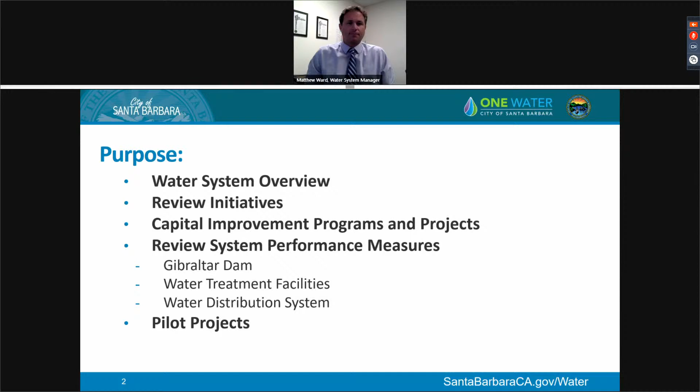Thank you. This is our water system overview, and I know the water commissioners are familiar with this. It's always impressive to see how we are able to supply water to our region. One of the fun facts I always share with others is how Gibraltar water is conveyed to Lauro Reservoir, which is our forebasin for the Cater Water Treatment Plant, and then distributed throughout the city, all by gravity. So that's always a fun fact to share.

Gibraltar recently celebrated its 100th year birthday, and many of our components in our distribution system, mainly our water mains, are also at that centennial mark as well. Next slide.

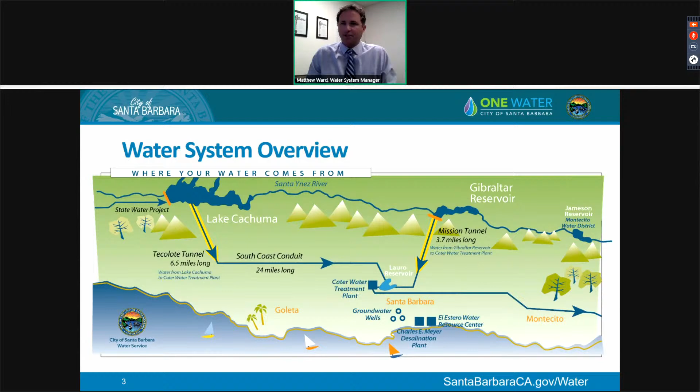And of course, you are familiar with Mr. Haggmark and myself as the water system manager. I would also like to introduce Theresa Lancy, who was recently appointed to the water distribution superintendent position. She oversees over 40 staff with the support of her 3 supervisors, who include Robbie Days, who oversees our pipelines, Roger Arroyo, who oversees our pump stations and reservoirs, and Maggie Heinrich, who is our acting water distribution supervisor, overseeing our metering, admin, and planning efforts.

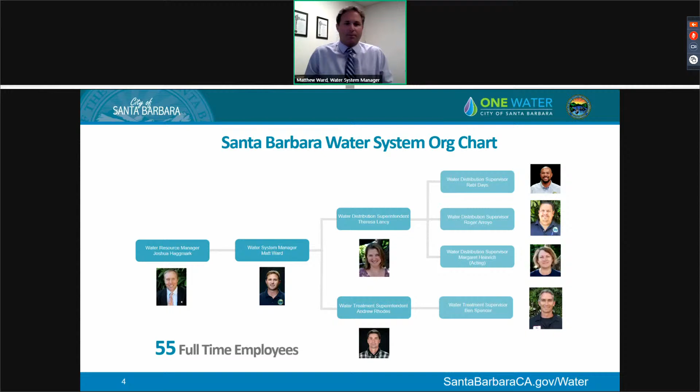Next, I want to introduce Andrew Rhodes, our water treatment superintendent. He oversees our Cater water treatment plant as well as the Ortega groundwater treatment plant, and has been instrumental in helping us manage our desal contract and understand the treatment components. He has supported and overseen over 15 employees for our treatment facilities, and Ben Spencer, the water treatment supervisor, assists him. Altogether we have 55 full-time employees and about another dozen hourly employees who make sure the water system is operated. It's quite an effort to get water all the way from our surface supplies to downtown.

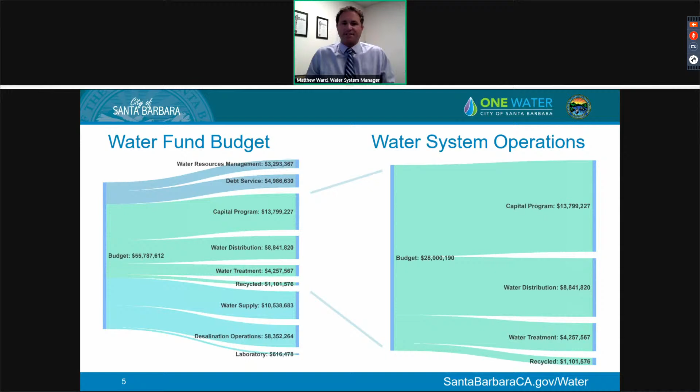On the left you see the water fund budget is over $55 million. The water system operations and capital component of that is over half, so $28 million in total. The main components are our capital program, almost 14 million; our water distribution program, nearly 9 million; our water treatment program, just above 4 million; and our recycled water program, about $1 million annually.

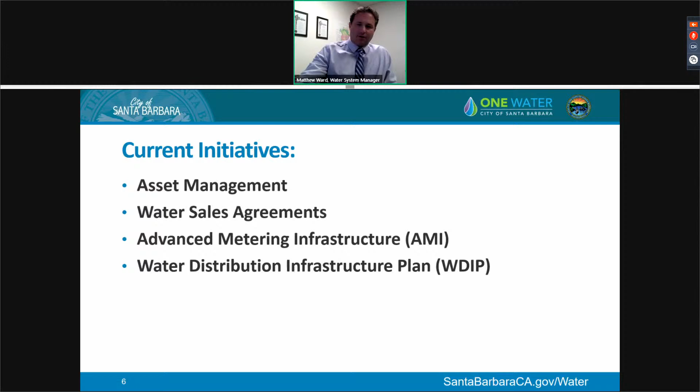I want to go over the current initiatives that I mentioned earlier. That includes our asset management, water sales agreements or regional partnerships, our advanced metering infrastructure work, and also results from the water distribution infrastructure plan, which you also have a copy of. I do want to mention that the copy you have is not final, it's actually in draft form, so wanted to make that clear.

So our asset management update. The water system has tens of thousands of assets or components. We're working to track those using electronic inventorying by location, and also maintenance management software to track conditions, cost for budget purposes, and projecting useful life. As far as asset management goes, it really takes about a decade of effort to get a fully developed program, so we're fairly new to the maintenance management software component.

Water distribution began working using Cartegraph as a database. It's actually used citywide, which is important, but also adds complexity because it involves other users such as transportation and streets. We've been working collectively to figure out how we can track all of our assets collectively, especially in areas of overlap, for example between streets and water, and I'll talk more about that later in how we're coordinating.

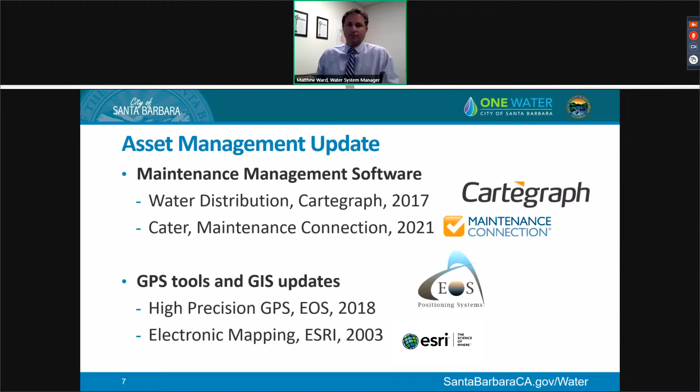We're also going to have to figure out the impacts to our organization with this new information that we're going to be gathering. So we'll be coming back to you for feedback and also to share what we believe it'll take in order to make sure that we're able to maximize the use of AMI data for our customers and also for our operations group. Next slide, please.

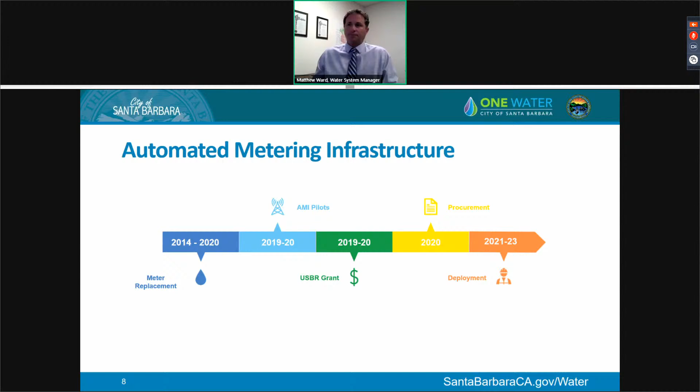So our water sales agreements, and we really look at those as regional partnerships. I just want to touch briefly on how system operations is impacted and how we contributed to the success of getting some of these water sales agreements lined up. And that's involved collaborating with our neighboring agencies, but also collaborating internally using that One Water philosophy of how we can come up with ways to deliver recycled water.

So involving our wastewater treatment staff with our water distribution staff, to look at the system and how we can model it, how we can tweak it, how we can test it, so that way we can ensure that we are able to maximize the use of our resources. And same with the Montecito partnership that we're pursuing. A key component of making sure that that was viable was identifying existing infrastructure that we could use in order to convey water from the desal plant to the Cater water treatment plant. Next slide, please.

Another major initiative, and it was quite a workload this year, was to undergo the water distribution infrastructure plan. It's been quite a journey, and a lot of folks were involved with it, which is good. As you're aware, the purpose of that was to develop a long-term capital improvement plan that guides investment decisions for aging system infrastructure while improving system reliability, redundancy, and operational flexibility. We did that in 4 phases, involving planning, hydraulic modeling, infrastructure evaluation using existing studies in order to inform and update a capital improvement plan, which is resulting in the water distribution infrastructure report. Next slide, please.

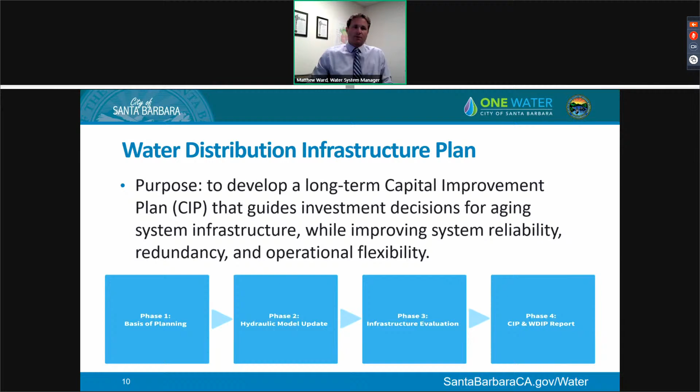Some key findings were regarding storage capacity improvements and prioritized replacement needs. I want to unpack that a little bit because we did learn a lot from this study. Some of the stuff we expected, which was the premise for doing the study, but there was also some interesting findings that I'll get into. One was that we identified decreasing storage needs. So as our system was developed, we knew that parts of the system had been adopted from the USBR. Also, parts of our system were part of developments where we inherited assets that were part of the development. So we really needed to look at what are our future demands and where do we need to store our water?

Part of the decreasing storage needs was we figured out that we're storing less water in the system in order to deal with changes in water quality, really regulations. So we're operating our system far differently than we did in the past, where we used to maximize storage for all kinds of reasons. Some of those were fire flow concerns. Some of those were simply that we can pump water off peak or perhaps produce water at certain times, and it was easier for the operations group.

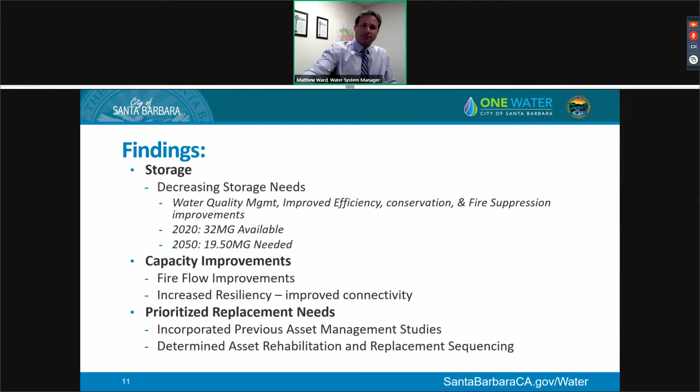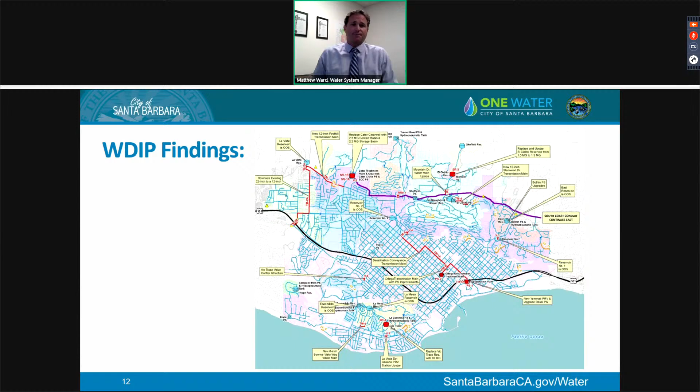We also knew that many of our reservoirs are between some as old as 100 years and have received some improvements over time, but the majority of them are at least 50 years without significant investment. So a large part of why we did this study was to determine what reservoirs, what our storage needs were, where do we need to invest in storage, and that $75 million represents the result of the study.

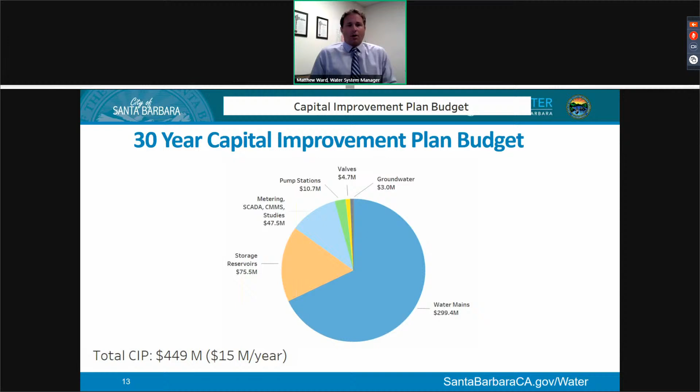So now I'm going to be moving on to capital improvement programs and projects, and some of the results of the distribution study and how it impacts capital.

So here's a list of our major capital projects. I'm just going to touch on the major ones at this point, and we'll be revisiting some of this when we come back and discuss budget next month. I'll be talking about the desal conveyance pipeline, the Cater Chlorine Contact Basin project, as well as Vic Trace reservoir replacement and our ongoing water main replacement work.

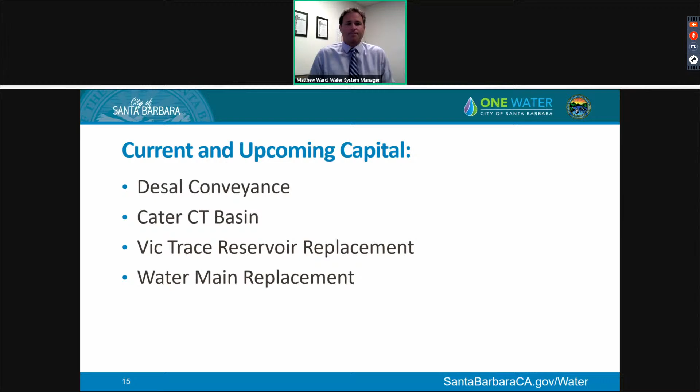At Cater, we'll be proposing that we move forward with a chlorine contact time basin, which is a project that was born out of the need to create enough contact time within the clear well at Cater. I'll talk more about that project in detail.

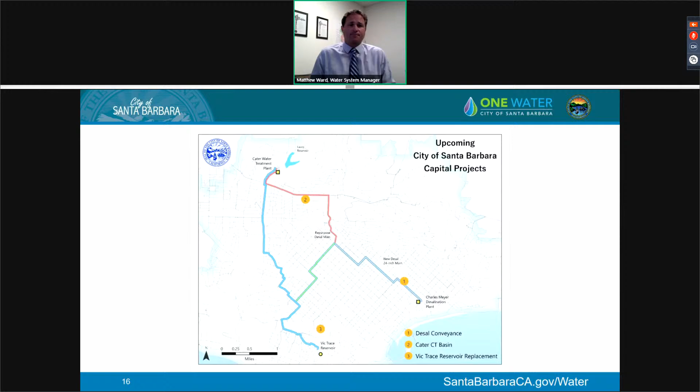And if you look at the whole thing, this is how we're basically going to convey water between our surface treatment plants and our major storage site on the west side of the city. Next slide, please.

And water distribution has been actively involved in helping review this new asset, as well as water treatment, and what it'll mean for the city.

Some of the benefits of this pipeline, beyond connecting our 2 surface supplies and adding that resiliency, is the ability to also convey surface water supplies on a temporary basis or as needed down to the low zone.

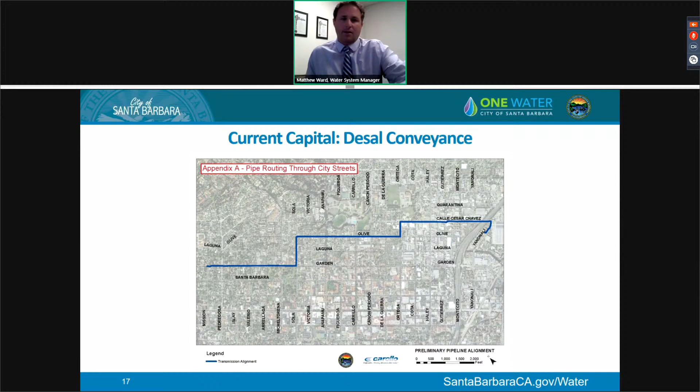And as you will recall, we were looking at doing some improvements within the clear well to help circulate water through that clear well and prevent short circuiting in order to meet contact time requirements. In looking at the design for that project, we identified some constructability issues as well as some seismic issues that needed to be dealt with.

And ultimately, we had to look at coming up with a different design that would support the ongoing needs for the clear well. And that's how the Cater chlorine contact time basin project was formed.

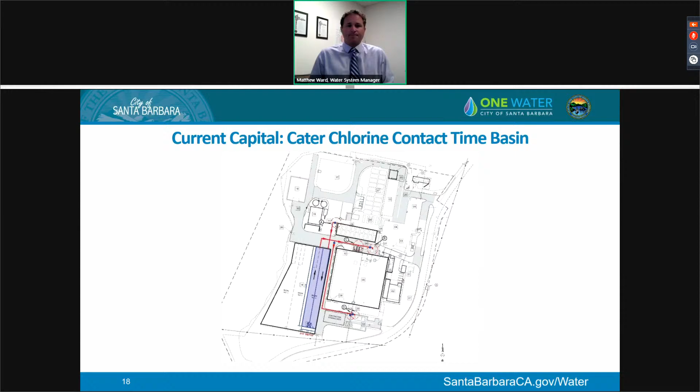So connecting the desal plant to Cater will also provide that resiliency and additional ways to distribute water throughout the system, but it'll also allow us to blend water, which will have benefits throughout the system. Next slide.

About $41 million, and we'll be talking more about that when we come back to present on budget. This will be a significant planning effort. It's a little further out in the planning horizon than what we'll be presenting, but we just wanted to give you a fuller picture of the water distribution infrastructure plan work and what our ultimate plan is going to be for how we make a more resilient system.

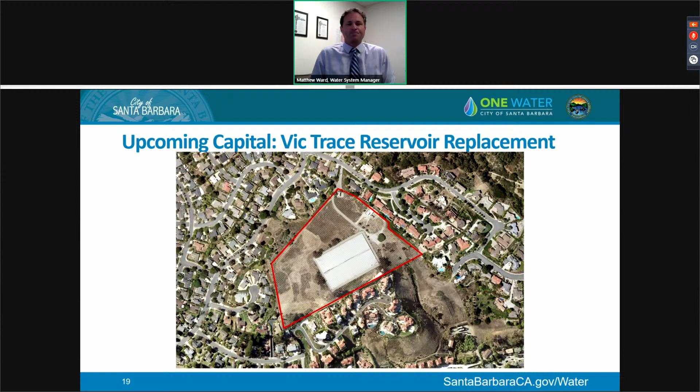It just so happened that Measure C was passed and we were able to get more capital funding for our streets program and our transportation programs. So what we're looking to do is to partner with them to some degree and coordinate the replacement of our water assets as well as our street assets.

Most of our water assets are buried for at least 50 years for our valves, and in some cases 100 years for our pipes. The street maintenance cycle is more on a 7 year basis, so we've got two very different moving targets there. It's really important to the public that when we go and replace the water main, we don't do it ahead of our street work, because then it's just poor scheduling.

So we've been working hard to meet quarterly with our streets group, and that includes their capital work as well as their operations work, because they're actively doing paving in both sections, to make sure that we try to get our water mains replaced before they do their street work. So far it's been going very well. The public doesn't always see that, but the result is nice when you have the work coinciding so close, and what our residents see is the water main work, and then shortly thereafter the street work occurring.

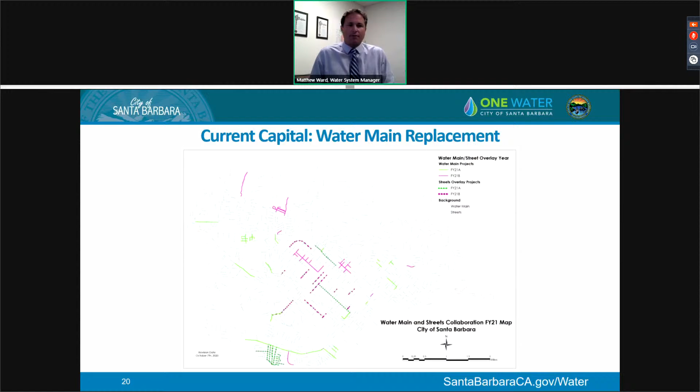Next slide. So now I'm going to be moving to water system operations, touching a bit on what our operations do, as well as some of the key performance measures that we have, some of the performance measures that stand out to us. Next slide.

So Gibraltar Dam, we're ultimately responsible for reporting to the DSOD, coordinating conveyance with water supply and water treatment, and monitoring water quality and sampling at the reservoir. We're also responsible for coordinating with other agencies, that's COMB, USBR, County Flood Control, as well as others.

What's kind of surprising is that the asset is supported primarily by 2 full-time employees, also at times by others from our engineering team, as well as our distribution group, in order to do special projects and capital projects. But on a regular basis, we have 2 employees up there who perform operations and maintenance duties, preventative maintenance tasks. A lot of what they're responsible for is also during storms, to make sure that we pass debris through the debris gate and make sure that operations are seamless and well coordinated with our water treatment group, which I'll talk a little bit more on water quality and the impacts there.

Another significant part of what they do is road maintenance. There's several miles of road that connect Gibraltar during the winter and high flows. There's actually 2 access roads to the dam. The lower access road is inaccessible during parts of the winter, so it's really important that we do road maintenance and keep those roads cleared. For those of you who have been on that road, you understand the terrain is quite steep and rugged. So it's important that we stay on top of that maintenance.

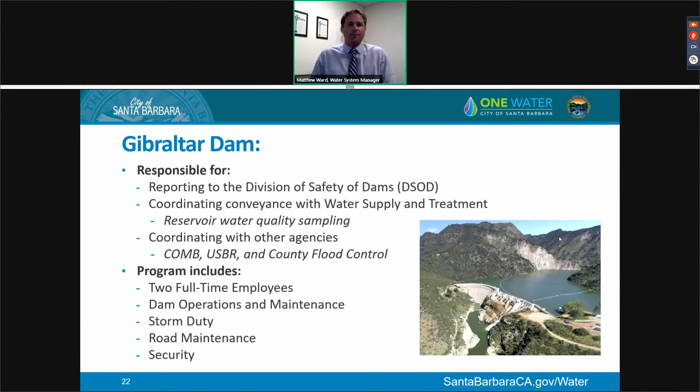Our water treatment operations are responsible for drinking water quality, supporting water supply management, consulting on desal, and coordinating with member and neighboring agencies. That includes Cachuma, COMB, and I was really impressed, in taking on my new role, with how well Andrew Rhodes, the treatment superintendent, makes this look like a small part of his job. He also manages not only COMB, but the JPA members, coordinating well and managing expectations there.

We also deliver water to the La Cumbre Mutual Water Company, which I know you're aware of. Periodically we're working with Goleta as well, as needed, to make sure we're good neighbors on an operational basis. If we have a small need for water or they have a small need for water, we're able to coordinate that.

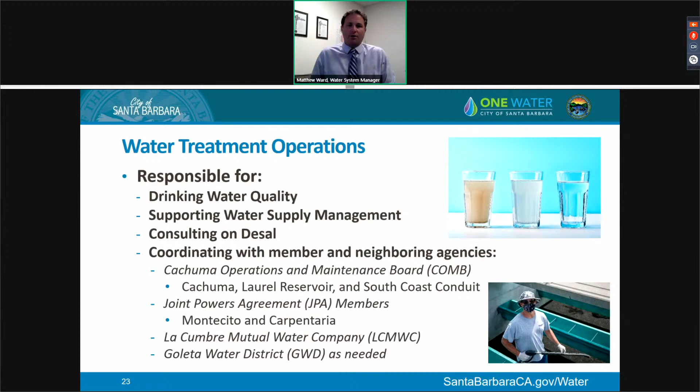Continuing with our water treatment operations, as you're aware, the program includes the Cater Water Treatment Plant, the Ortega Groundwater Treatment Plant, and the hydroelectric plant. Some of the performance highlights we'll touch on for each include surface water production, energy production, and groundwater production.

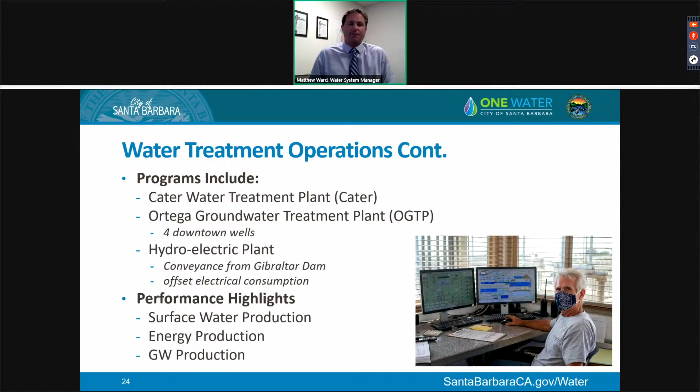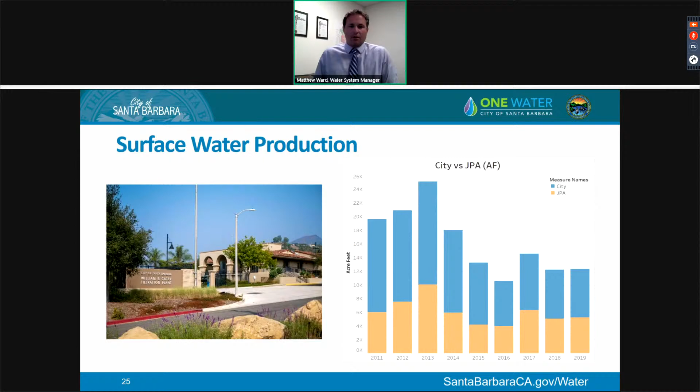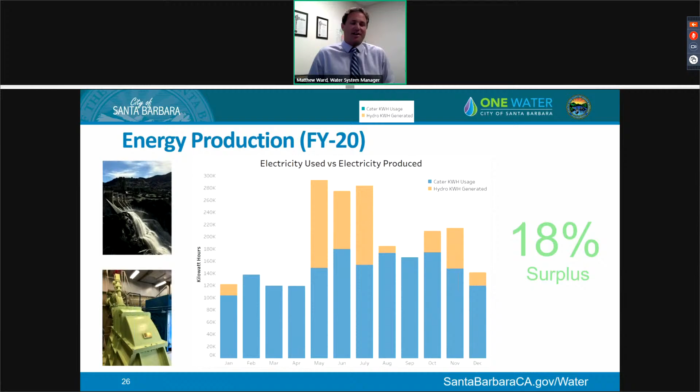Briefly, I wanted to touch on groundwater - the Ortega Groundwater Treatment Plant and the corporation well rehabilitation. As you know, we're resting our basin, but we also need to continue maintenance. We test our wells periodically as required to provide water quality samples, and we also have to maintain them periodically to rehab the downhole well casing. So it's an ongoing effort.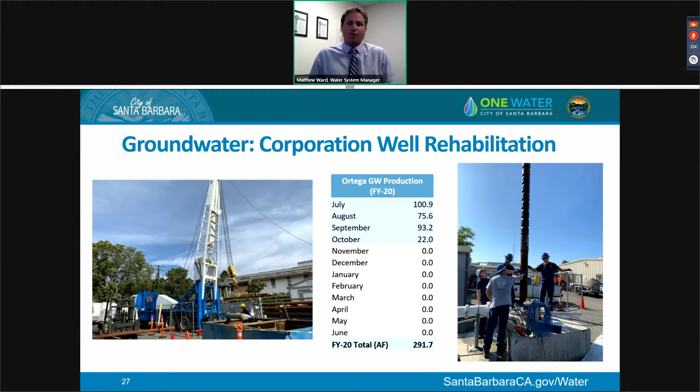We did produce some water this year, but it was mainly to support this project where the groundwater basin tends to recharge a little faster. So we pumped water for a period of time in order to perform the rehab work that was needed on this well.

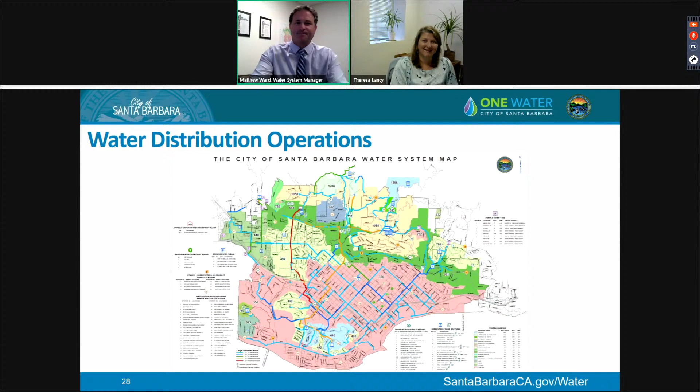Thank you, Mr. Ward. I'm very pleased to be with you this morning to share with you some of the things we have going on in water distribution operations.

As you can see from this map, we have a lot going on. The different colors represent the 17 different pressure zones in our system. We have 13 active reservoirs, 14 pump stations, a little over 300 miles of potable water pipe, and a completely separate recycled water distribution system we oversee. We have over 27,500 water meters and service connections tied to those distribution systems. With all this complexity, we are rated the highest level system by the state, a D5 system. The simplest way to summarize what we do: we manage everything from when the water leaves the treatment plant until it arrives at the customer or private property.

Next slide, please. This shows some of the programs and asset classes we oversee. We don't have time to cover everything, but this is a sampling. Within asset classes like water mains, we have programs such as main replacement and main repairs. In the photo, operator Corey Olison is working on a SCADA panel, part of our instrumentation system, another program we oversee. That system allows all the different facilities spread throughout the city to provide data and controls here at our offices, and also to interact with Cater Water Treatment Plant.

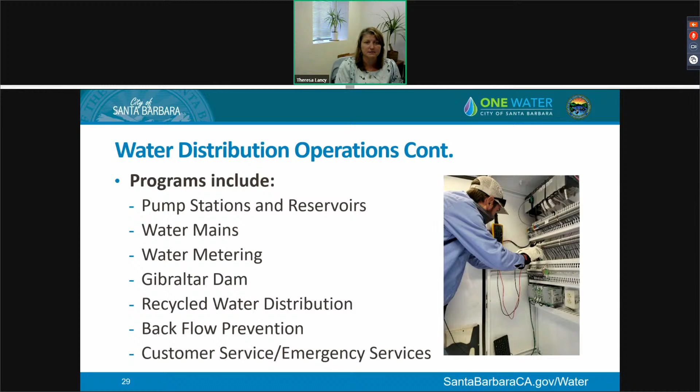Next slide, please. Today we're going to go over some of our performance highlights and talk about our performance measures, commonly referred to as P3s. In the photo on the right, operator Ernesto Lazaro is manually operating one of our valves. On the left, operator Jeff Becker is working with one of our recycled water customers.

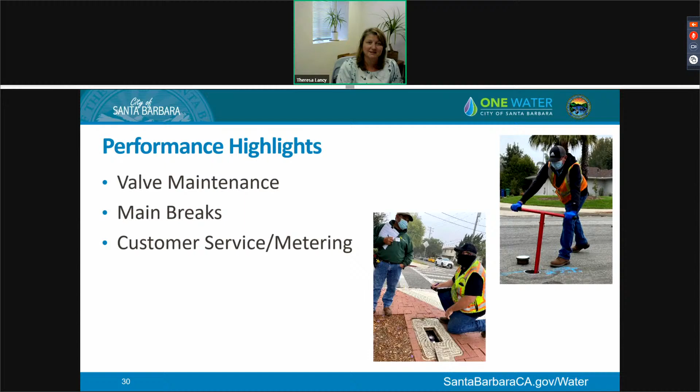Next slide, please. But first, I wanted to update you on where we're at with main breaks. As you can see, our 25-year average is around 70 main breaks per year. Typically we've been falling below that line, but in more recent years we're going above it.

Next slide, please. You can see it's trending upward because the main cause is that a lot of the post-World War II cast iron pipe installed is nearing the end of its useful life and commonly experiencing failures. We've been keeping an eye on these trends and are actively managing our water main replacement to become more surgical about which pipes we replace, looking at condition assessment as well as risk to determine which pipes most need replacement, as well as coordinating within the city with our streets and wastewater folks.

We wanted to share our appreciation for the support in increasing to the 2% replacement rate. It's a significant workload, but we feel it will pay a lot of dividends in the long run, helping us find pipes at greater risk, get those addressed, and hopefully start to make this trend line go back down.

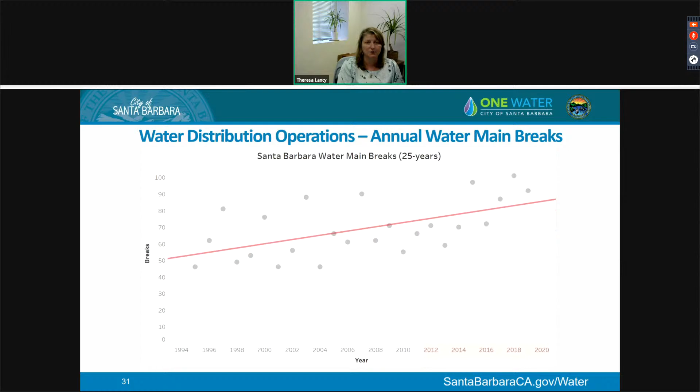One of the metrics I'm very pleased to share is our goal for responding to water main emergencies. We're able to restore water service within 12 hours, 97% of the time. That 12 hours is measured from when we're first notified about a possible issue until the water is actually back on in the customer's home. We understand this is probably one of the most visible aspects of what we do to the public and can cause the most disruption to their lives, so we take it very seriously to handle these emergencies efficiently and safely, and reduce disruption overall.

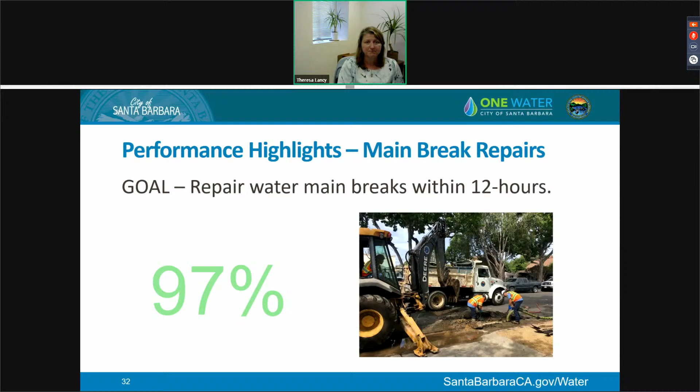Here I want to show that we've been ramping up our efforts to exercise our valves. Valves are extremely important to the overall operation of the system, allowing us to shut down portions for planned or emergency repairs. In FY18 we were far below target, mainly due to staffing vacancies and competing priorities like our meter replacement project. It's not as simple as turning a valve off, because opening and closing valves can create water hammer, which can damage our pipes. So having well-trained operators doing this in a carefully controlled manner is extremely important. In the photo on the left, operator Scott Matchin is using a device called a valve actuator.

That valve actuator device not only operates the valve, opening and closing it, but also records the number of turns it takes to do so. That's an important performance metric for us, tracking how the number of turns changes over time as we manually actuate these valves. Using our Cartegraph system, we track this data, which helps us prioritize water mains by looking at valve condition along with main condition when prioritizing areas for replacement.

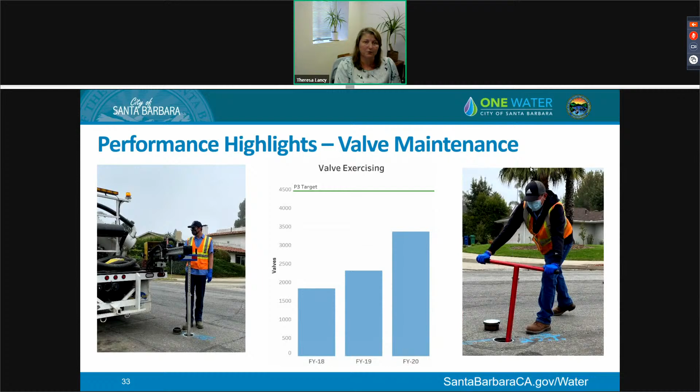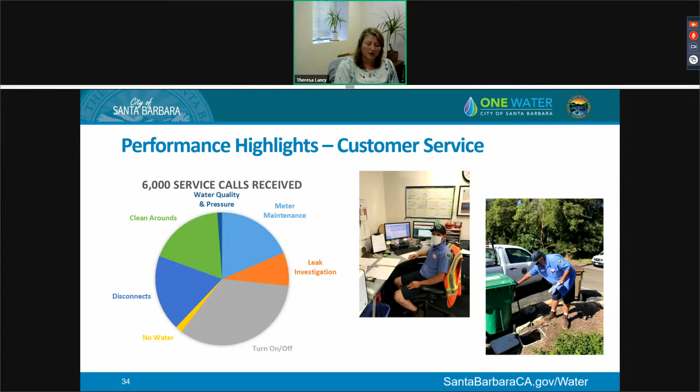This is an area both Mr. Ward and I are very happy to share with you. The water industry is always evolving, with new technologies emerging - some turn out great, some not as useful as hoped. We've worked with a company called Isle Utilities and joined their technology approval group, which has tremendous networking capability, allowing us to work with other member utilities that pilot different technologies, and then we share the experiences.

So other utilities, especially some of the larger ones like LA Department of Water and Power or Metropolitan Water District, have more bandwidth to try out some of these newer technologies and see which ones are really very useful and which ones are maybe not really there yet as far as being ready to roll out for an industry standard. This is sort of our commitment to research and development. We want to make sure we're always using the latest and greatest and most appropriate technologies, because as you'll see with some of the pilot projects I'm about to discuss, it can really make some major impacts to our effectiveness as a utility.

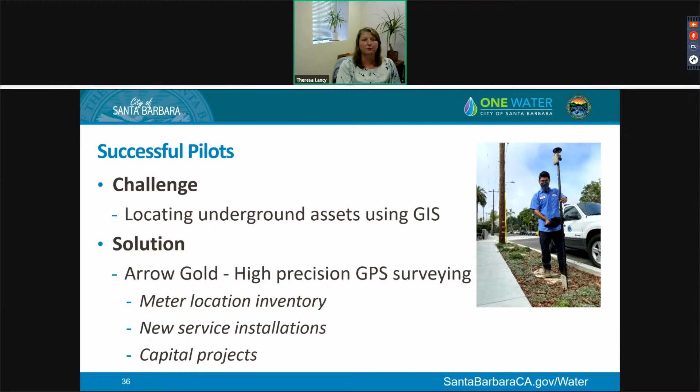We first started with just collecting asset location information, and now we're really expanding its use. We're using it now for the installations of new services. So when we go out and there's a new development that needs 5 new water meters, we're getting all of that location information, survey quality, as that infrastructure goes into the ground. Now we're expanding that also into our capital improvement program, working with our engineering division and having our inspectors also use this equipment to collect valuable information while everything is exposed. We're also working with our streets department to get asset information for our valve cans during street overlay projects, finding it a great tool to help us coordinate internally.

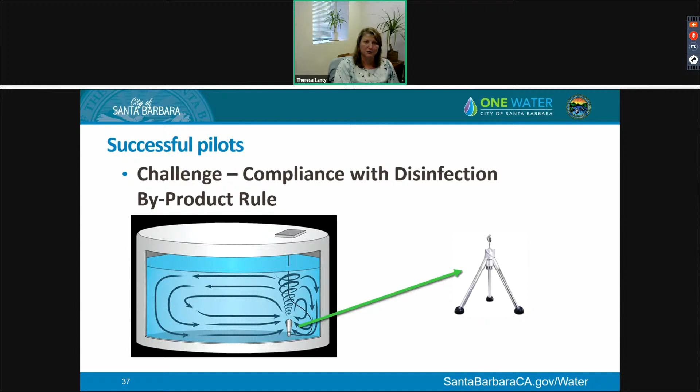All of that water is more stagnant and not really moving much at all without the mixer. On the right is the actual device, what one of these looks like.

It wastes virtually no water and has other advantages over the conventional method, like greater data acquisition. Now that it's going through the filter truck, we're actually able to look at chlorine levels, turbidity, things like that, and we're able to take samples and get a lot of data from the areas that we're flushing.

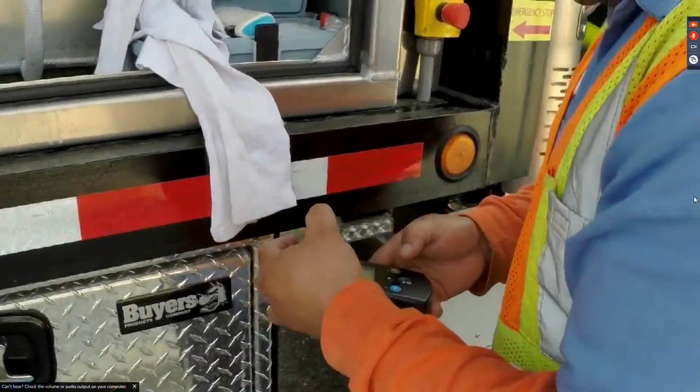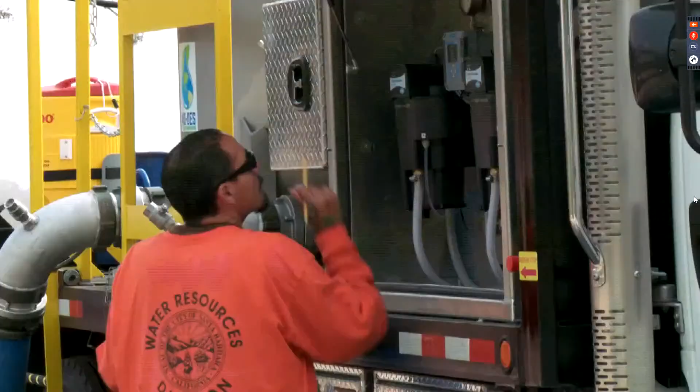We also realized that there was some benefits to flushing the system in a unidirectional manner, which is to get an idea of the velocities and any restrictions or constraints that may occur in the pipe, and then also get an understanding of the buildup in the water mains in these areas.

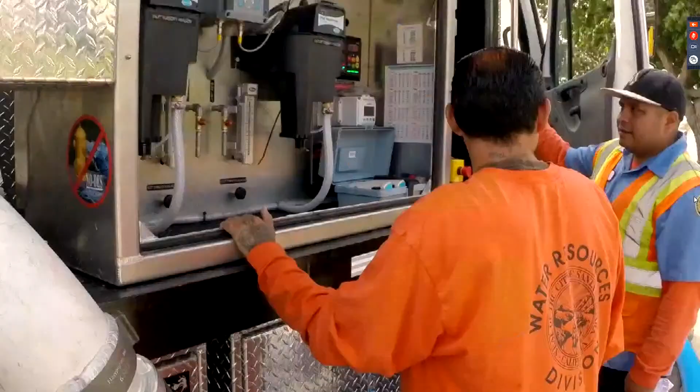The NO-DES system has been so successful, other municipalities have been looking to follow suit. We were one of the first to pilot this, and in fact, we've had other agencies calling us, asking us how it's going. It's popular. It's going to be the future of flushing and water distribution.

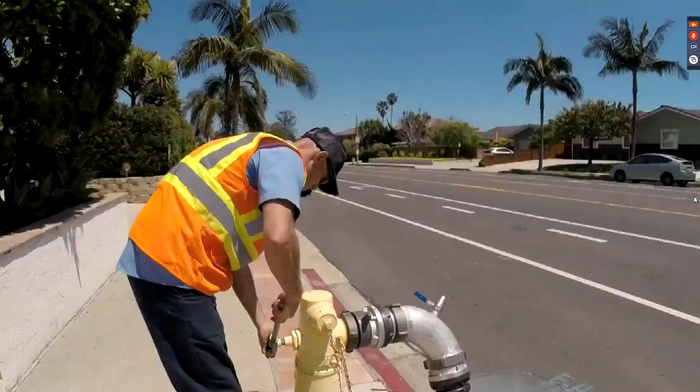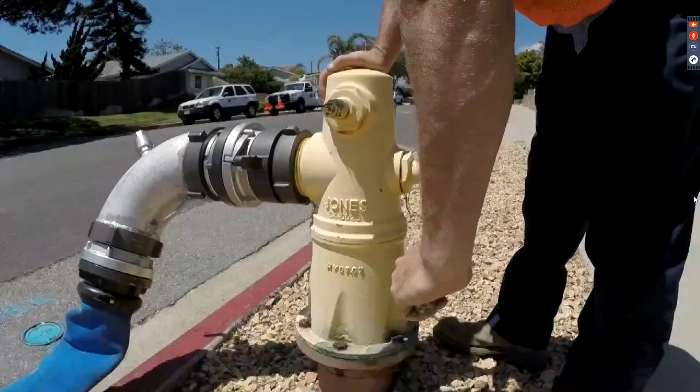As the Water Resources Division cleans its way through the city's water main system with this cutting-edge technology, you can rest assured that the water delivered to your meter is continually tested and meets or exceeds all state and federal water quality standards. You can also feel good that virtually no water is being wasted to accomplish this.

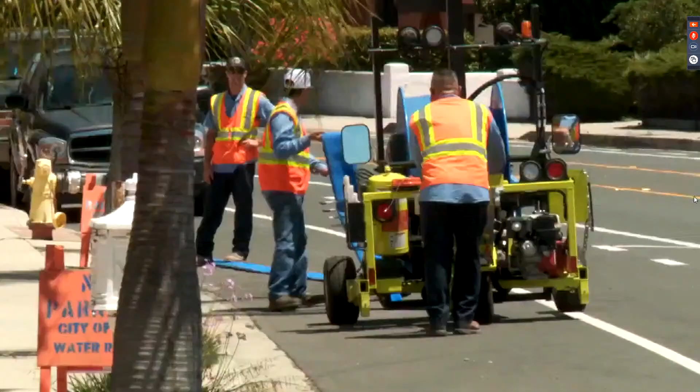We're real excited that we were able to procure this piece of equipment and integrate it into our water main program. Really happy with the fact that we were able to pilot it, that it was a success, and that it's got multiple benefits that'll better serve the community long term.

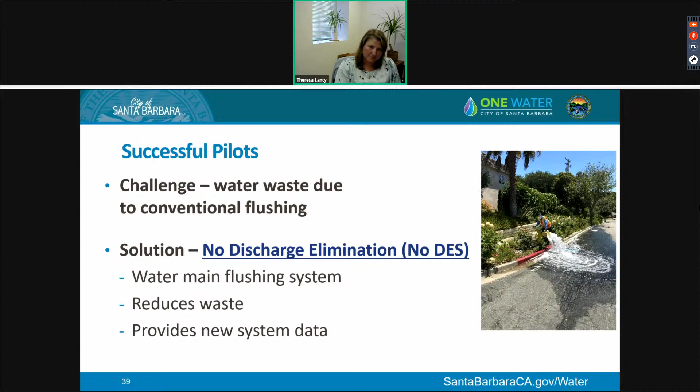And so just to wrap up, I wanted to let you know that we're continuing this idea of innovation within water distribution. We are working with GIS Inc. to continue to leverage this high precision GPS data that we're collecting.

This project has two goals. The first goal is to try to automate some of the process of collecting some of this data that we're getting from the GPS devices and bring it into our geodatabase in a way that's fairly seamless and get to be even closer to real time than it is now.

And it's also doing a quality control check on the data. The way that we have our GIS set up is we have our overall citywide geodatabase, and we also have a version that we're using with our Cartegraph system. This project will help us with ensuring that those two systems do not get out of sync.

We're also looking to pilot Doppler software, which is an automated call management software. We're going to use this to leverage our after hours calls and also our call out process when we need to respond to after hours emergencies.

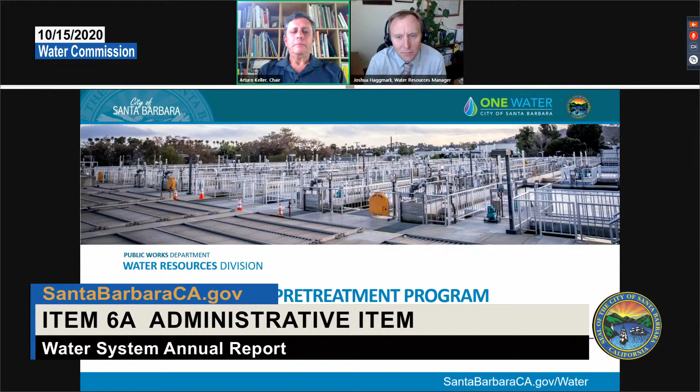Our next item, administrative item, is the local limits and pretreatment program administrative update. Mr. Haggmark: Chair Keller, we have with us today Galen Farrer, our water quality superintendent, and Mary Thompson, who will be giving us an update on our local limits effort, which has been underway for a long time now and we're finally pleased to bring this to you. I do want to give you a heads up—this is an item that, if recommended by the commission, would go on to City Council. If approved by the City Council, it goes on to the regional board for final approval, so the regional board is the ultimate approver of this at the end of the day. With that, I'll turn it over to Galen or Mary. Thank you, Mr. Haggmark, Chair Keller, Commissioners.

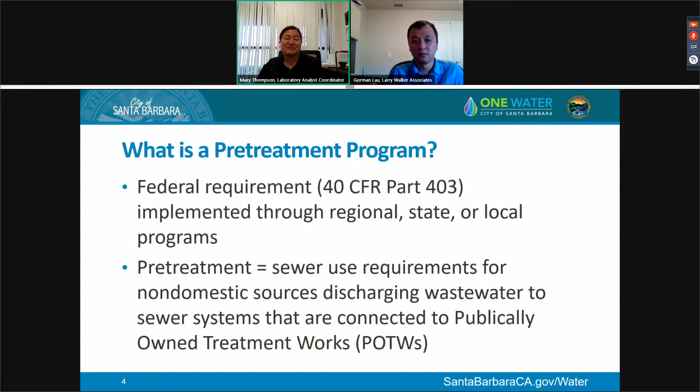So who must have a pretreatment program? As defined in those federal regulations, any POTW with a design flow greater than 5 million gallons a day must have a pretreatment program. However, there are instances where POTWs with design flows less than 5 million gallons a day are directed by a regulatory agency to have one.

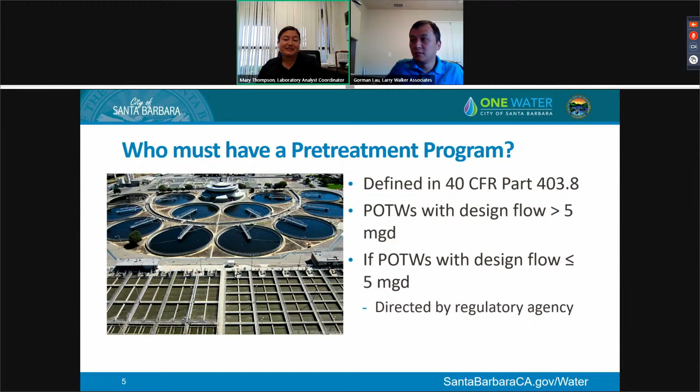So why do we need a pretreatment program? First, we need to protect El Estero Water Resource Center, which is Santa Barbara's POTW, from interference or upset of treatment operations. We need to prevent pass-through of pollutants, prevent harm to the POTW's infrastructure, and protect biosolids and recycled water quality—think reuse for that. We also ultimately need to protect public health and safety.

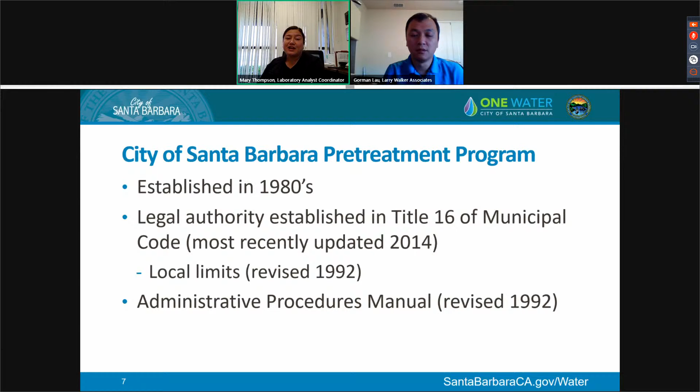The City of Santa Barbara's pretreatment program was established in the early 1980s, and its legal authority was established in Title 16 of Santa Barbara's Municipal Code, most recently updated in 2014 regarding pretreatment. That document also includes the local limits, which were revised in 1992. The Administrative Procedures Manual was also revised around that time, in 1992. So as you can see from those dates, it's time for an update for the pretreatment program.

Now I'm going to talk about the pretreatment program modifications. Modifications are really needed when there are significant changes to the approved program, which was submitted to the regional board many years ago. We need to update the program to reflect current conditions because a lot has changed—like upgrades to El Estero Water Resource Center, our POTW, and changes in the permitted industrial users, with some leaving and new ones coming. We also have changes in the applicable regulations, like the new NPDES permit we were issued in December 2019.

So here are the proposed modifications. We are proposing to update the Administrative Procedures Manual, which is our pretreatment program document, and Title 16 of the Municipal Code, specifically the local limits.

So the proposed updates to the administrative documents: we added clarification to the types of wastewater discharge permits. In 2014, we added tiers to the types of permits, which gives the city more flexibility and discretion on which types of permits go to which types of industrial users. We also reduced sampling and inspection frequencies to be aligned with federal regulations.

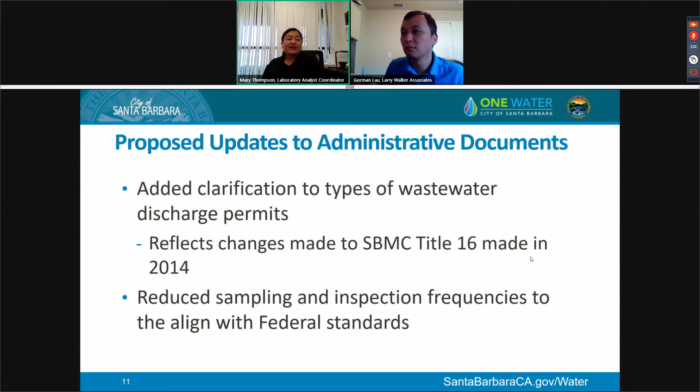We also added language about record-keeping procedures. We modified our enforcement section to add clarification. We updated the public participation requirements, and we updated the confidentiality requirements.

The proposed modifications to Title 16 revise the current threshold of 10,000 gallons per day—we revised the definition of a significant industrial user from 10,000 gallons a day to 25,000 gallons a day to match the federal standard. As it currently stands at 10,000 gallons a day, we actually are regulating and permitting users that probably don't need to be regulated and participating in this program. But the city will still have discretion to permit users less than 25,000 gallons a day based on potential threats to the POTW.

We also added language for monitoring waivers. This gives the city and the users more flexibility, and it frees the burden of testing for these constituents. For example, for trace organics, those tests can be very expensive, and monitoring waivers will give us that flexibility. We are also updating those local limits.

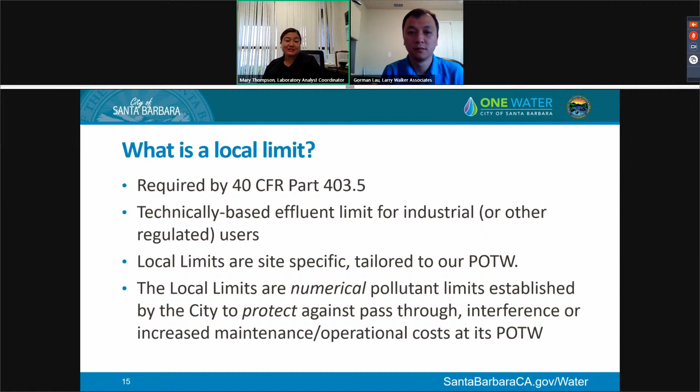So you might be asking, why do we need local limits? Well, as I mentioned, it's required, and these are for much of the same reasons that we need a pretreatment program. We also need to protect our POTW, and most importantly, protect health and human safety, as well as the environment.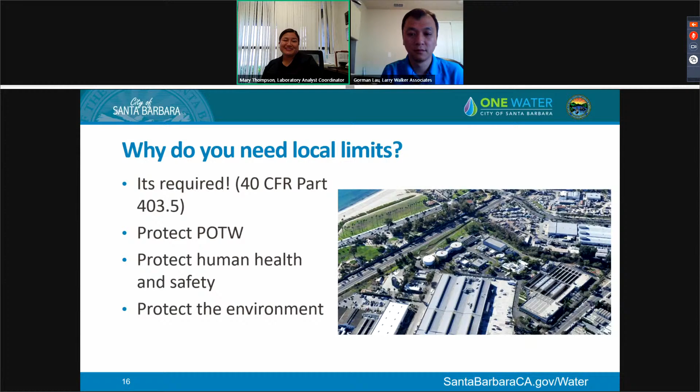I want to walk you through this process, which has taken us several years. Beginning the process, we need to identify our pollutants of concern, which you can find in many ways, including a national list of pollutants of concern. We also need to determine treatment and plant removal efficiencies for each pollutant. We need to identify the environmental and operational restrictions, and we collect that data through sampling.

From all that, we can calculate the maximum allowable limit for each pollutant. With that, we can also calculate the maximum allowable amount of pollutants for industrial or regulated users for their loading. If you look at the pie chart, I'm talking about the green wedge of that pie—it's not a large portion, but it is the most impactful. We also need to review our local limits periodically.

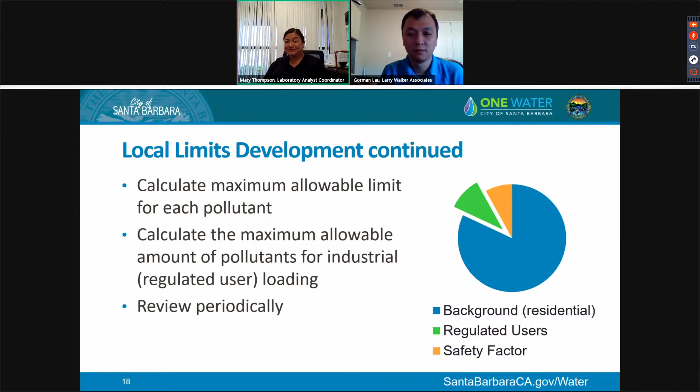We proposed our new local limits, and we also sent notification of the new proposed local limits to the permitted industrial users, participants of the pretreatment program. In 2017, we started a secondary process upgrade, and also in 2017, we decided to delay adoption of the new local limits to be able to verify and complete construction.

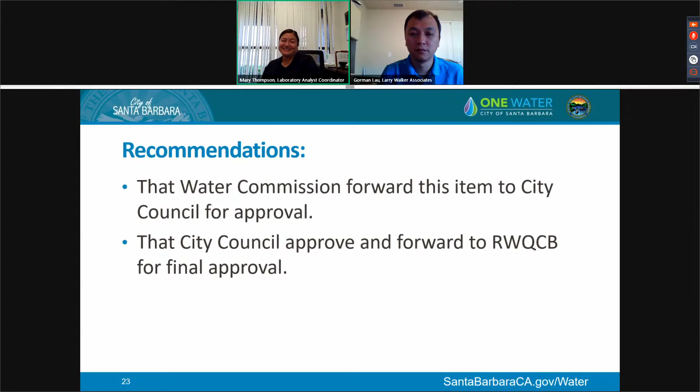Thank you so much for your time, and I'll take any questions.

Thank you very much for your presentation. I think it was very clear. I have a question to begin with.

I can see that you're changing some of the limits, and I was just curious why in some of the metals it's going up slightly. Is it because you feel you have more capacity to deal with them? Metals don't get transformed, so I just want to understand that change. I can see the other ones going down and others being added.

Gorman, do you want to take that, Nancy? Oh sure. Chair Keller, the reason why some of the metals change in terms of going up or down really depends on the removal efficiency at the treatment plant.

Back in 2015 and with some of the more recent data we looked at, we calculated removal efficiencies through the treatment plant using this specific data. That's why Mary was talking about local limits being site specific, and it really depends on how the treatment plant performs. So they get adjusted. It's been quite a while, about 25 years since the last time the local limits were updated, so things have changed quite a bit.

Okay, well, thank you very much.

Thank you, Councilmember Snedden. Just a quick question: how hard will it be, or how challenging, if at all, to meet these new limits? Is that future capital work, or is this something that's easily within what we're doing now?

Second, the proposed city limit for the uniform local limits for total oil and grease was calculated at 12,000 milligrams per liter for total oil and grease, and the limit has been reduced to 100 milligrams per liter. I totally understand that 12,000 milligrams per liter of oil and grease is prohibitive and would cause issues in the sewer system and the treatment system. MarBorg was previously given a limit of 400 milligrams per liter for total oil and grease, which is far below the 12,000 milligrams per liter from the study. We would like to know the possibility of moving that limit to 400 milligrams per liter. Those are my questions, thank you.

Okay, so hi Berlinda, the relationship between the HSS and the local limits is really that there's no relationship. They're really two separate items. The local limit, like I explained, was derived from data that we have taken and from our plant-specific information. The HSS is a rate, and it is a separate item.

The oil and grease, we wanted that to be protective in nature due to the plant processes, but also, as I mentioned, MarBorg can still apply for an alternate limit, provided that they submit a technical justification for the limit that they're proposing. Thank you.

Just as a follow-up, Allison, we'd be happy to meet with you and Hillary Hauser to talk about this further. Galen, Mary, and even Gorman, we're happy to speak with you more about that. And Allison, I just want to let you know that the hospital is one of our industrial users.

They're permitted because a lot of their laboratory, in the past, had a lot of operations. They have since moved out to Goleta, but their operations dictated that we would have an industrial permit for them. So they are still monitored, the challenge with the hospital is that they've got, I think, 23 outfalls, Mary, correct me if I'm wrong. 27. So we are monitoring just one of them currently, but it has been in discussion.

Mary and I have discussed that multiple times, and we keep going back and forth on whether we want to permit every single outfall, what the workload would be if we were to do that. And then in addressing your COVID concerns, we are still monitoring COVID in the influent, and I am happy to report that we've had 2 consecutive non-detects from the samples we've had. So things seem to be calming down here in Santa Barbara, but we are still monitoring for that. But we are happy to meet with you or Hillary before we take this to council.